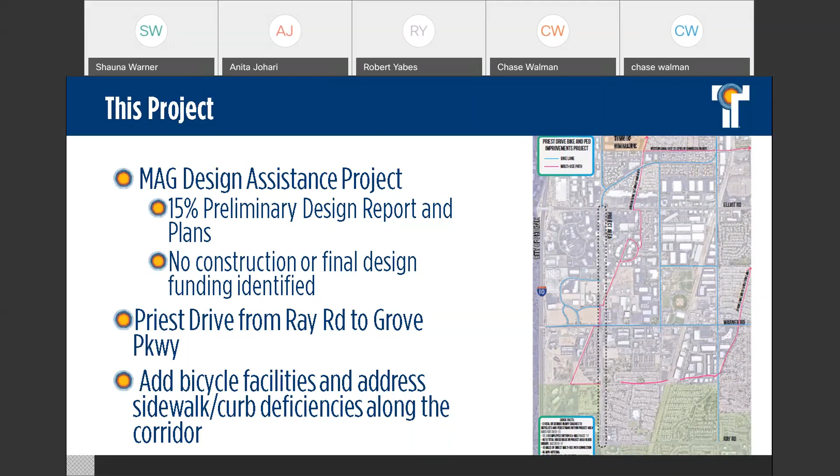These two photos look at both the north and south termini of the project. This left photo is the northern end, showing the continuation of the buffered bike lanes north of Elliott on Grove Parkway, looking north towards the future roundabout location. The picture on the right shows our southern limit of the project.

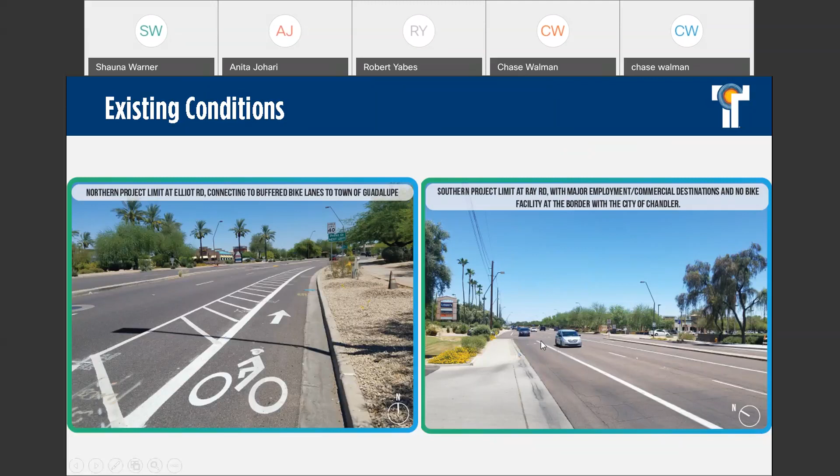This is Ray Road, again looking northbound, showing more of the character of the commercial areas and some of the destinations that can be accessed directly along Priest Drive.

Along the corridor, there are many different cross sections. This is available to view on our Priest Drive webpage that Laura mentioned before. All of these same materials will be available, including the public meeting presentation and the actual boards with these cross sections, if you'd like to view and zoom in closer.

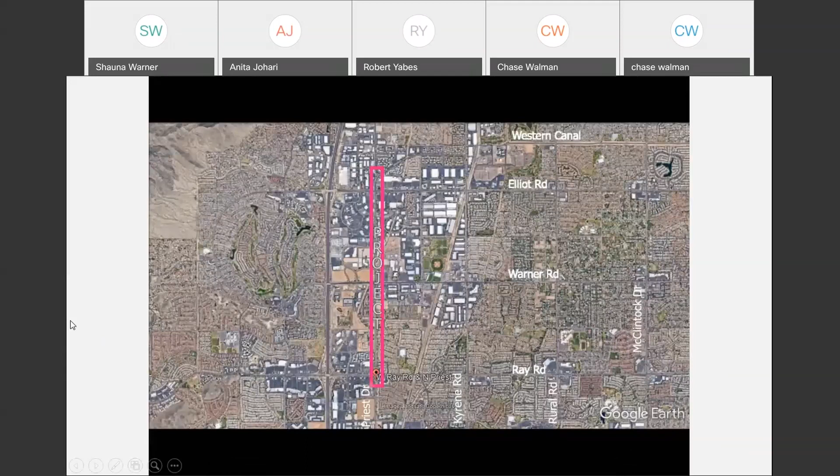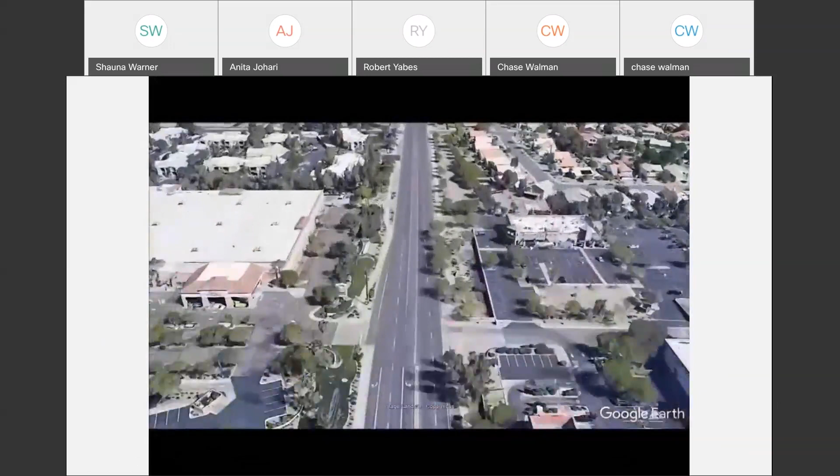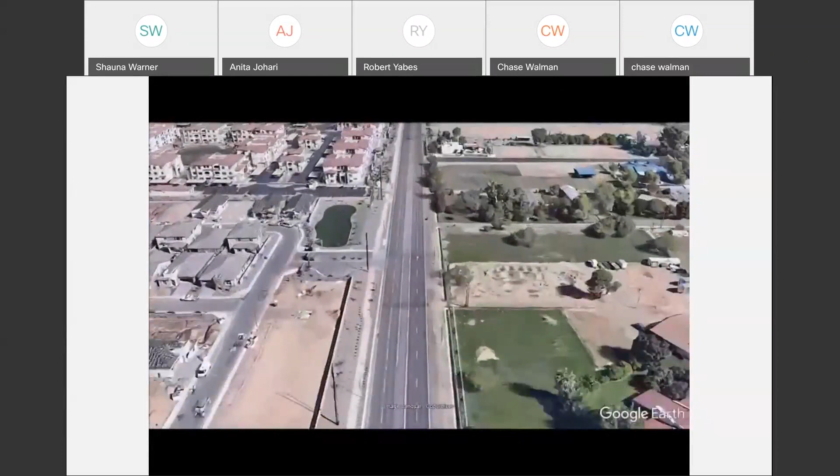As you'll see in the video, the intersection of Ray Road and Priest Drive has commercial entities on all four corners. As we progress north, Priest Drive becomes more residential, with houses and apartments on both sides. Some newly constructed apartments and homes have also built a bike lane adjacent to their property. On the east side, as we approach Caroline Lane, there's a gap in the sidewalk facility because that's part of the county island along this roadway.

We're approaching Warner Road, and you can see Highline Canal. A new signal was added at Commerce Drive to help with the Highline Canal. Now the roadway transitions to a 6-lane section. The transition occurred right south of Ruby Drive, and this continues as a 6-lane section up to Elliot Road, where the Costco area is. Near Elliot Road, the northbound rightmost lane has been converted to a bike, pedestrian, and bus lane, which feeds into the buffered bicycle lane near Grove Parkway.

That was also shown in the previous picture. The future roundabout, which Tempe is planning, will be constructed at the intersection of Grove Parkway and Priest Drive. Next slide, please.

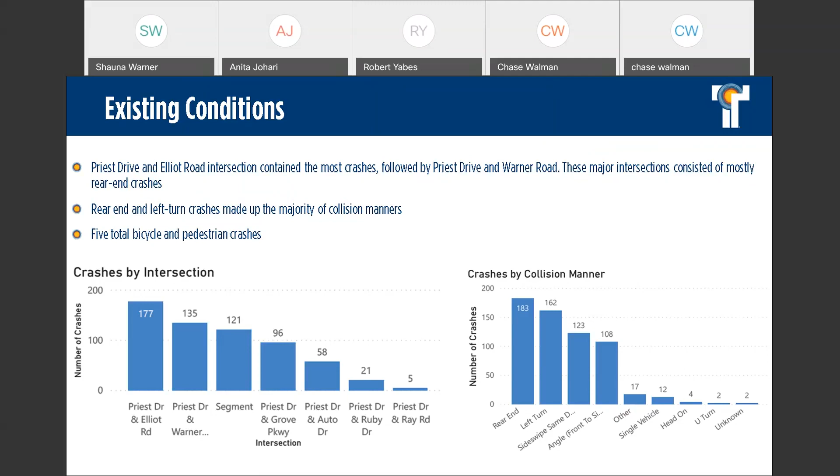Next slide, please. So now we go into our proposed alternatives.

Next slide. We are going to be presenting four alternatives. Alternative 1 includes keeping the existing roadway infrastructure as is, but widening the roadway to accommodate the bike lane. The second is adding the bike lane adjacent to the sidewalk, so the bike lane is off street. The third looks at an option to reduce the number of travel lanes for the southbound movement from Elliot to Warner Road, and using that extra infrastructure to accommodate the bike lane. The fourth alternative is our no-build alternative.

We use the FHWA and the NACTO guidelines to develop these alternatives. The FHWA, the Federal Highway Administration, gives us good guidelines on what should be considered when looking at a bike lane facility - bike volumes, connectivity, access to destination points, and potential conflicts if we add the bike lane. We have looked into all those aspects.

Then the recommendation would be to have a physical separation between the different modes of transportation, and a 2-foot buffer also acts as a separation between the vehicle and a bicycle lane. So all our alternatives, if they are on street, do include a 2 foot buffer space between the travel lane and the bicycle lane.

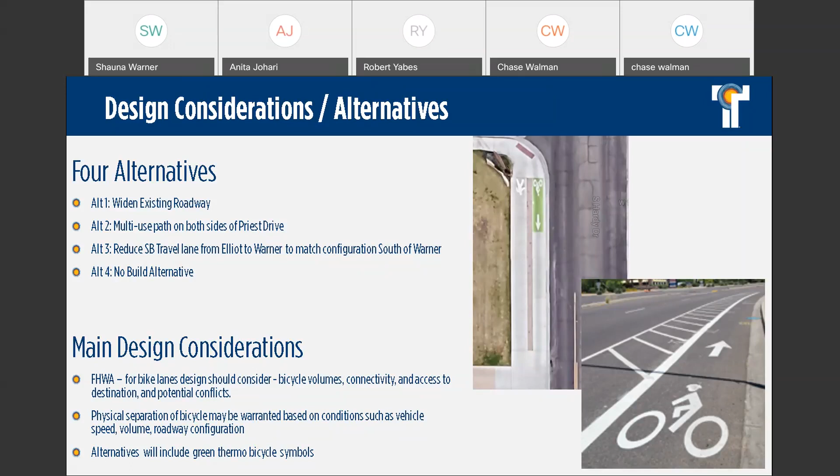This first alternative keeps the existing roadway geometry as is, but widens the roadway to the outside to accommodate the bicycle lane on both sides of the roadway. We are again going to go through a video. This will scroll from the intersection of Priest and Ray Road up to the end of the project. Start the video. I will mention for everyone that we are oriented north to the right.

The red lines that you see there are our right-of-way line, and you can clearly identify the bike lane, which is on street, and our sidewalk is identified in gray, which is off street, or it's also identified with the green line in this case, which is off street.

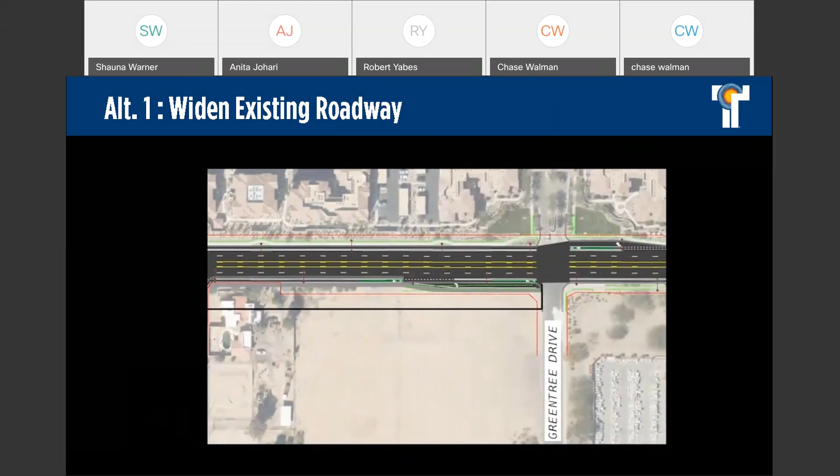As we go close to Knox, you see that the right-of-way has become smaller. That is the county island area where we will need additional right-of-way to accomplish any of these recommendations.

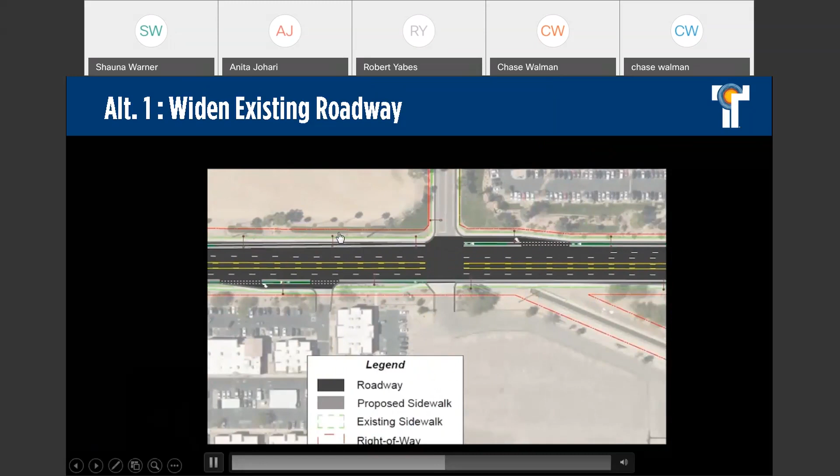We are approaching Warner Road, so the bike lane transitions to adjacent to the travel lane to accommodate the right turn lane. Here is where it transitions to the 3 northbound and 3 southbound lanes, which is the existing condition. We are close to the commercial area of the roadway, and you see that...

The bike lane has always been identified with a green pavement marking. At Elliott Road, closer to Elliott Road where the bike lane and bus lane are the same, we will keep that configuration as is and end into the roundabout design.

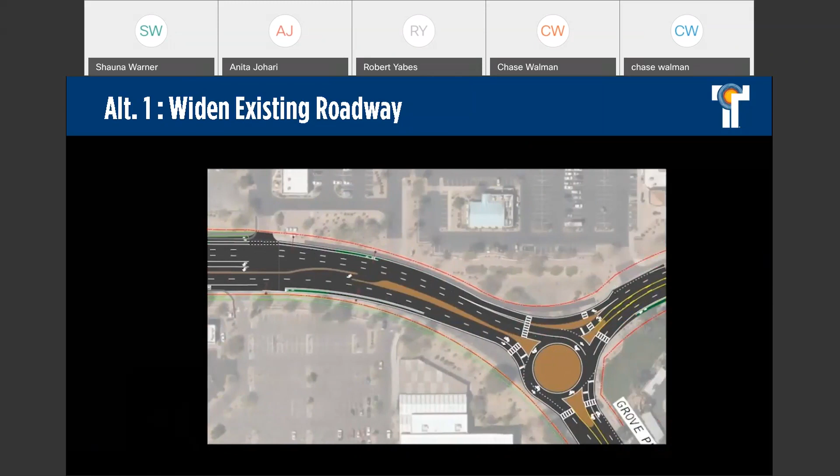Next slide. So this you look at how the cross section will look: the buffered bike lane on the outside, and you have this. This is near Ruby Drive, which is the commercial part of Priest Drive, where it has 6 lanes with a center turn lane.

However, to accommodate and reduce our right-of-way purchase, we have reduced the lane widths to make it consistently an 11 foot wide drive lane and a 10 foot wide center turn lane, or the 2-way left turn lane. We've also pushed the street lights to the outside of the sidewalk so we can illuminate the sidewalk and the bicycle lane adequately. Next slide, please.

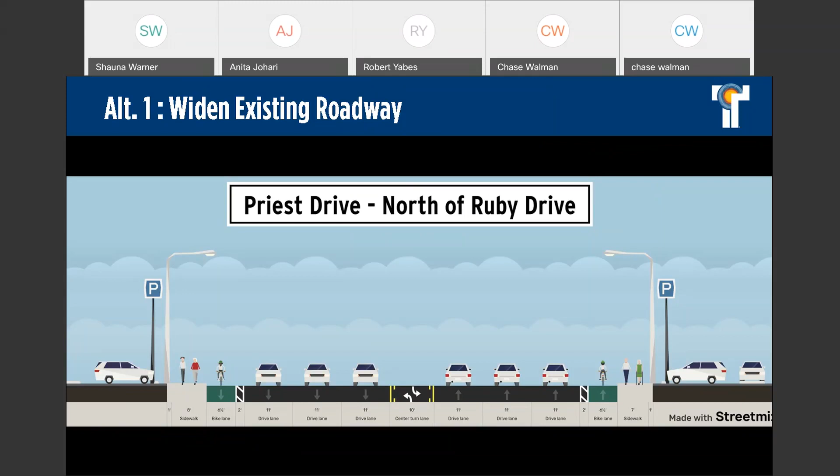In this alternative, we have actually added the bike lane adjacent to the sidewalk, so the bike lane is off the street and adjacent to the sidewalk. Start the video. Again, we are going north - north is to the right, starting from Ray and Priest Drive.

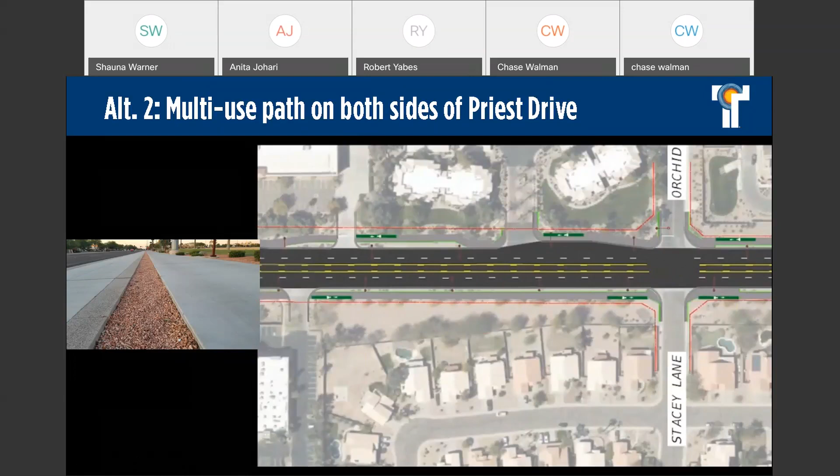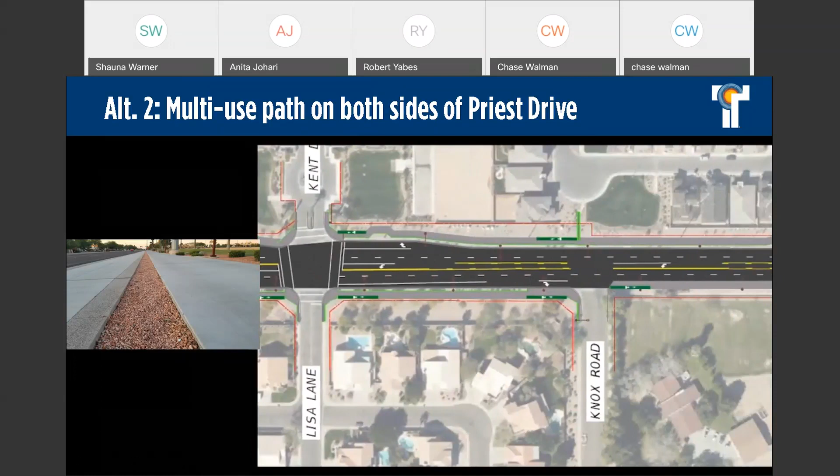The bike lane adjacent to the sidewalk has its own designated location on the sidewalk, and this - there will be an 8-foot sidewalk, a small 1-foot gap, and then a 5-foot bike lane on each side of the roadway.

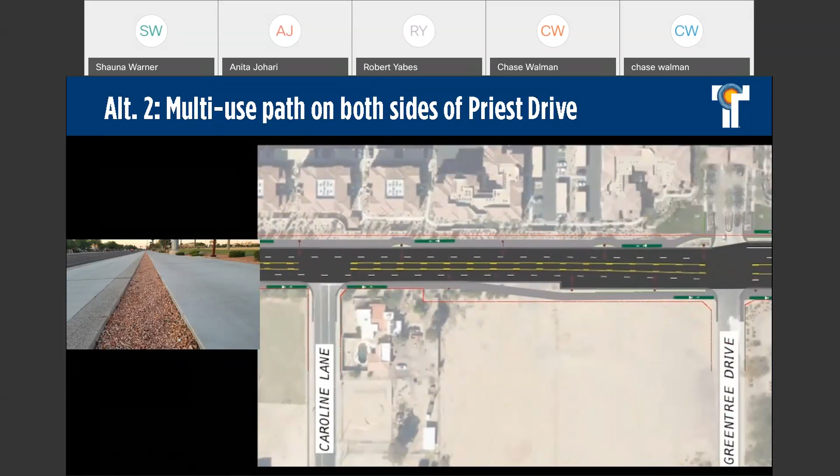This is again near the Greentree, Caroline Lane area. We will finish the sidewalk and the bike lane, so the infrastructure gap is resolved.

So we are getting closer to Elliott Road, and this configuration will continue past Elliot Road up to the location where it can safely meet with the buffered bicycle lane near Grove Parkway. So in this option, we may require some additional right of way to accommodate this multi-use path near Elliot Road and Grove Parkway, between Elliot Road and Grove Parkway.

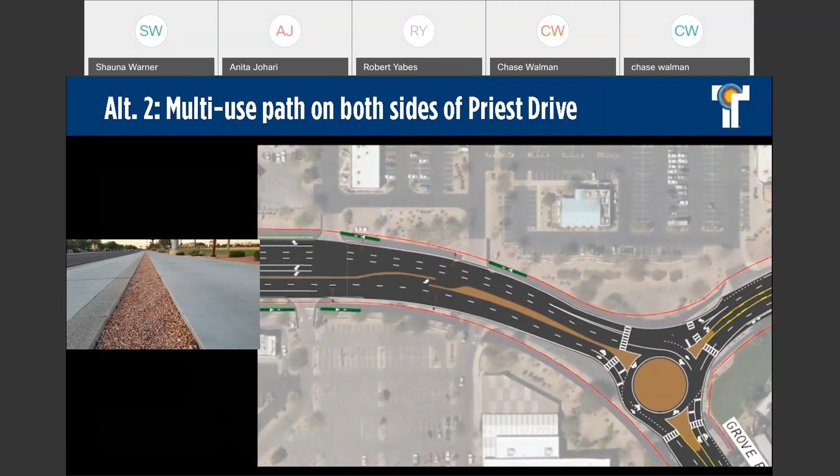Next slide. So in this option, while you will not see much change between Ray and Warner Road, we have reduced the number of travel lanes between Elliot and Warner Road for the southbound travel only. As we saw in the previous existing condition, we have 3 through lanes for southbound and 3 through lanes for northbound. Based on the capacity and traffic analysis, we developed this option to reduce the southbound to two through lanes and use that additional space to accommodate the bike lane. This also reduced our construction and right-of-way acquisition. Start the video on this one.

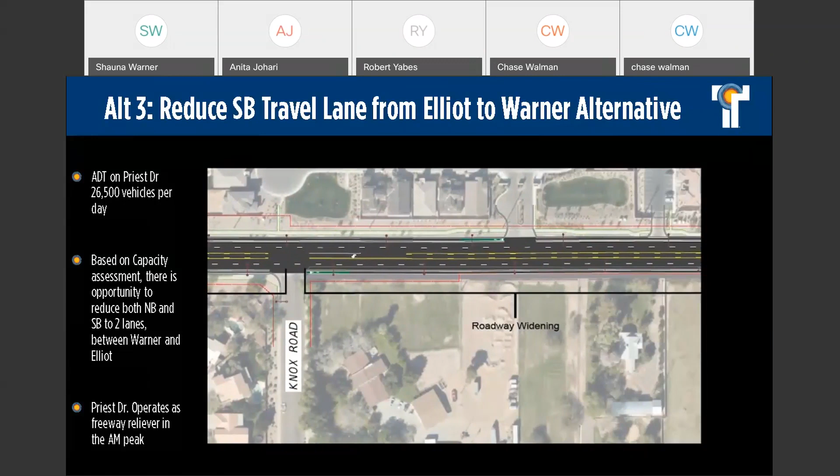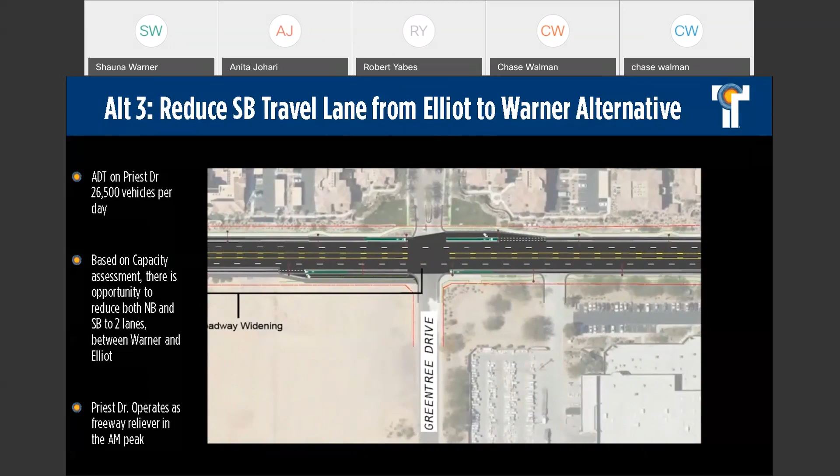So the other advantage of that is south of Commerce Drive, Warner Road is a 2-lane section. So the transition from the 3-lane to 2-lane in this is not a very difficult adjustment for the traveling public as well. So as you see, the southbound has 2 lanes while the northbound has 3 lanes. We are still keeping the center turn lane as is throughout this corridor. This gave us the advantage that it reduced our right-of-way acquisition and our construction opportunity as well.

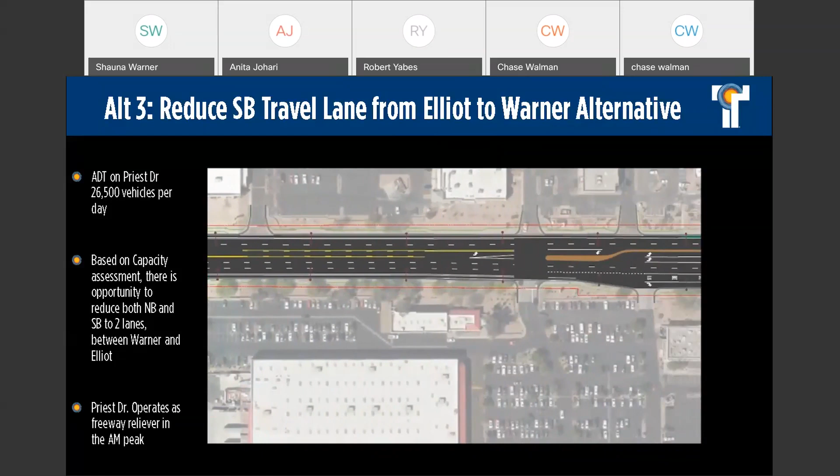In addition to this, we are also looking at, to make this a comfortable transition, the bike lane will just merge into the roundabout, the future roundabout at Grove Parkway. Next slide.

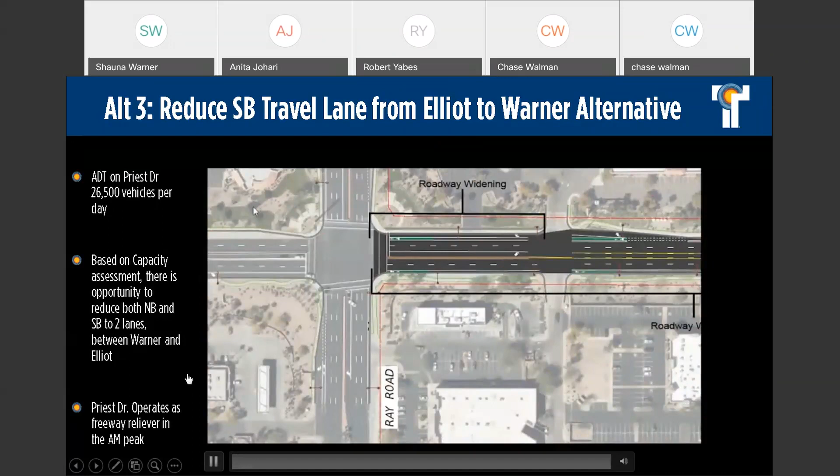So for all these options, next slide please. In all these options, we have maintained a 6.5 feet buffered bike lane for each direction of travel, and an 8-foot wide pedestrian sidewalk on each side of the roadway.

So while we were looking at different opportunities along this roadway, Priest Drive between Warner and Ray Road has a dense residential population, and also looking at the speeds, we looked at the opportunity to convert the center turn lane to a raised median. Start the video on this.

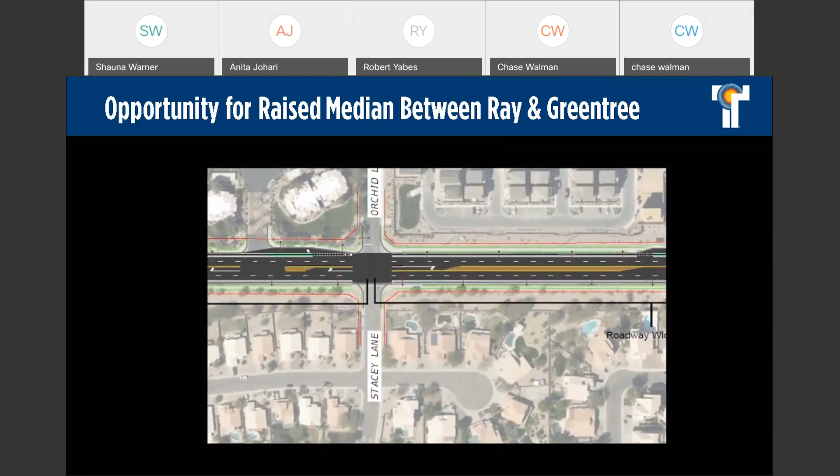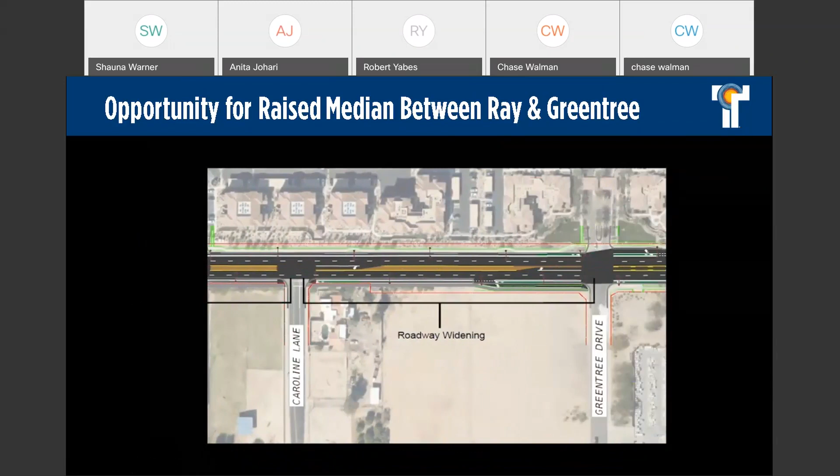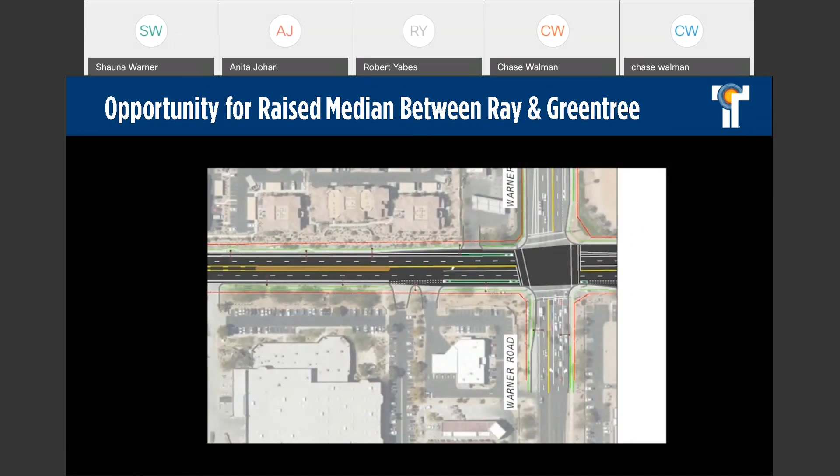So this option could be implemented in any of the 3 previously mentioned alternatives. That's why we didn't combine it with them. So in this, you see that the raised median has been added in place of the center turn lane, and a pedestrian crosswalk with a median refuge island has been added at Knox Road, which connects the communities to the east of Priest Drive to the Highline Canal using the existing trail in that area. The other advantage of this median is also speed control, where the center turn lane would act as a passing lane, but because of the raised median, that opportunity of it operating as a speed lane is reduced. Next slide, please.

So at Knox Road, while we saw it with the median option, we looked at several other options, including a traffic signal for accommodating the pedestrian crossing, but the pedestrian volume and the bicycle volume is very low to warrant a signal. In addition, Lisa Drive, which is just south of Knox Road, about 250 feet away, has a signal. It is within the recommendations or guidelines that if there is a signalized crosswalk within 250 feet, then another signal may not be needed.

So we looked at the crossing again. We looked at a pedestrian signal option, but the volumes don't meet the warrant. However, for people who do feel comfortable at a signal, it's just 250 feet south of this location. So one of the possible recommendations is to create a median refuge island at that location, so a 2-stage crossing can be completed there. Next slide.

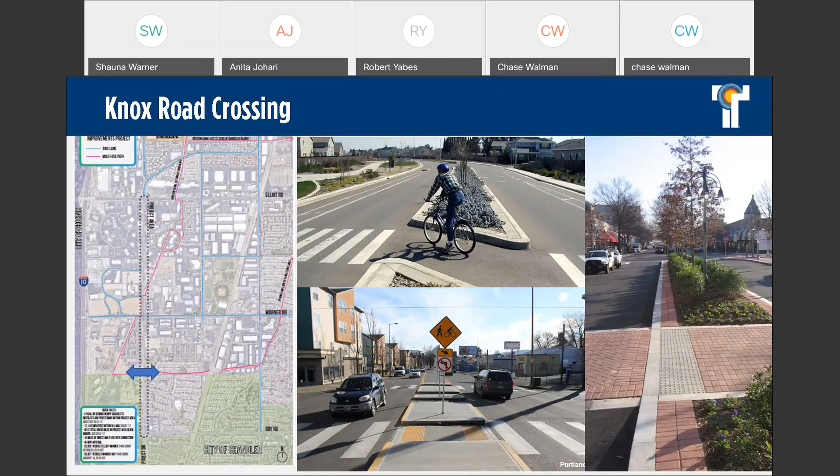So this is the next 2 slides. You will see a comparison of the alternatives, where we looked at features like safety, pedestrian operation, bicycle operation, transit, impacts to transit, and traffic operations.

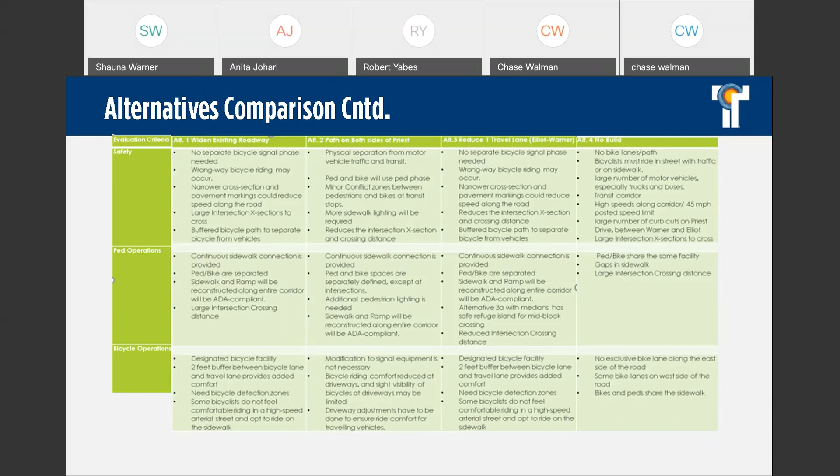Then connectivity: with the improvement plan, we are connecting all the commercial and residential areas together, and also connecting to the existing trails in the area. So all 3 alternatives are going to improve connectivity in the area.

Transit operation: there's no adverse impact to the transit operation. At the transit bus stops, if we have the bicycle lanes in alternate 2, the bicycles and pedestrians have their own designated spaces to maneuver near the transit bus stop. So that's an advantage with alternate 2.

Traffic operations: we are not changing much of the vehicular travel patterns or lane configuration. We are reducing the lane width to 11 feet, but 11 feet is within the acceptable normal range for roadway widths, so traffic operations are not adversely impacted in alternate 1 or alternate 2.

In alternate 3, we are reducing the southbound lanes from 3-lane to 2-lane configuration for a short distance between Elliot Road and Warner Road. But south of Warner Road, it's already a 2-lane roadway, so the traffic and capacity impacts from this lane reduction at these intersections are very minimal. So again, we are comfortable with that alternative as well.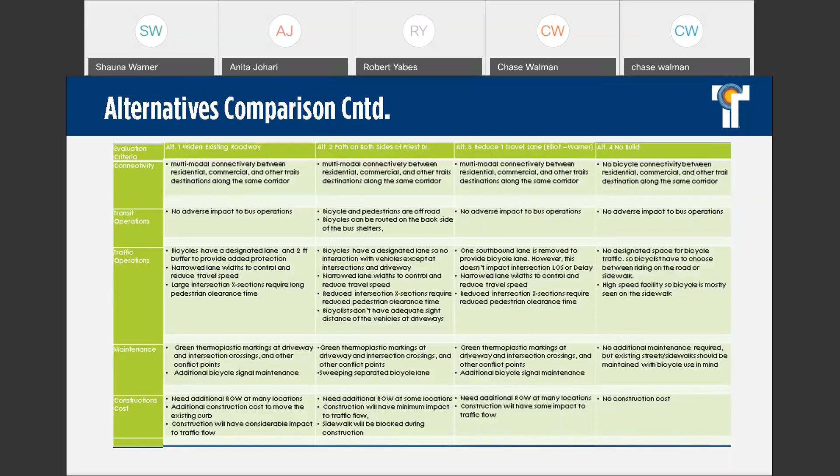Chase, do you want to take over the next steps? Right, yeah, thank you, Anita.

So for our next steps for the project, we are obviously in our first public meeting for this project. Like I said previously, we'll be coming back for a second round. In that meeting, what we're going to come away with from today, after we presented this alternative, we have a 2-week comment period.

So we'll be gathering not only the comments we've received to date from our various city commissions, as well as other resident feedback through emails or phone calls received to date, but also from the survey, which is available online.

Please take that survey at tempe.gov/priestdrive so we can include it in the official record as well as the public input summary. Those comments will inform us moving forward when we come back in the fall, when we'll be presenting refined alternatives.

So we may remove an alternative, we may combine alternatives, but we're not going to select a preferred alternative at this time. That's going to be for the later stage of design during our final design phase. So again, the end product of this project is to vet out any feasible alternative and further refine it from the public feedback that we receive.

So we'll be going again to the fall to present those refined alternatives to the public, as well as present this again to our Transportation Commission. And then ultimately that will culminate in getting our finalized 15% plans for those refined alternatives, as well as the report. That report shows all of our data collection, our initial environmental investigation, and probably more importantly, it will show what the projected costs are so that we as staff could start looking at how this project gets funded.

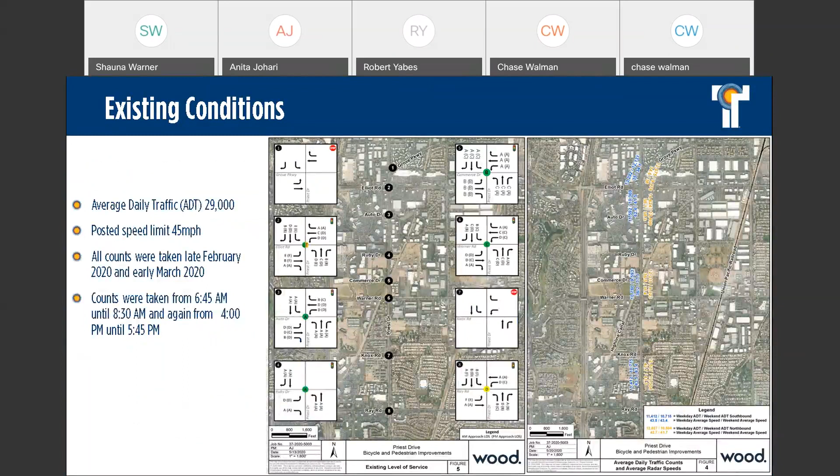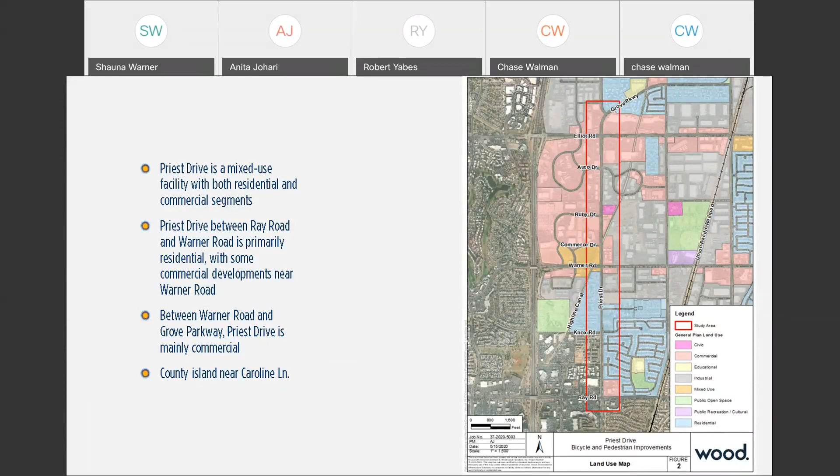That is city of Chandler. So that portion along Priest is actually the city of Tempe, so that's why we are designing. If I could move back here - it is Knox Road as far as the Highline Canal. This probably gives a good view of that delineation. But Priest Drive actually going south is where we're identifying improvements all the way to Ray Road. Okay.

Anyone else? Any questions? And I should say, sorry to interrupt - the city of Chandler is also one of our stakeholders, so we are going to be reviewing the design with the city of Chandler as well as the county, getting their comments and making sure that everything ties in with their infrastructure, especially tying into Ray Road there.

Okay, and we also have a comment from Tammy. She had to drop off, but she said she's overall excited for the improvements as a 20-year resident of Sierra Tempe and a very frequent pedestrian along Priest Drive. I look forward to the improvements.

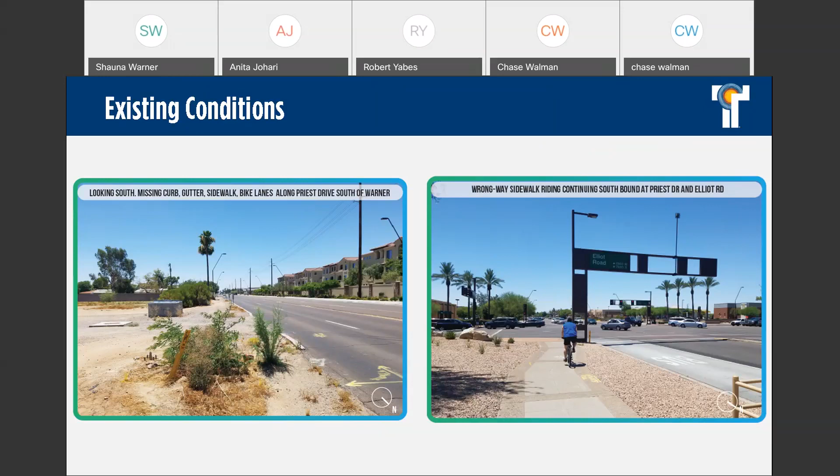Anybody else? I see another question about the use path, I can't read the whole thing, but the last one is, can a HAWK signal be considered on Knox and Priest? We are looking at all the options. We haven't ruled them out at this time, but as I said, pedestrian signal warrants don't meet the current volumes, but no option is ruled out at this time.

All right, do you see any other questions or comments? Let me check the chat here earlier on.

And while she's checking, I just encourage everyone again to visit our website at tempe.gov/priestdrive in order to access that survey. And if you wanted to comment further on any alternative, or if there's any additional elements you'd like to see as part of this project, we have a write-in portion to the survey, so please go ahead and include that in there.

Okay, I'm looking, and we have a question from Greg Larson. Hang on here, let's let Greg ask his. Okay Greg, you are unmuted.

Okay great, can you hear me? We can, thank you. All right, that's fantastic, thank you so much. Thank you for hearing me.

Let me start out by saying I am excited about the prospect of improvement of this section of roadway because it needs it. I live in Sierra Tempe, and I've lived in Sierra Tempe for several years. I am a cyclist, I'm also a lawyer. Part of my law practice is personal injury, so the way that I'm viewing these alternatives include a component of what is safe.